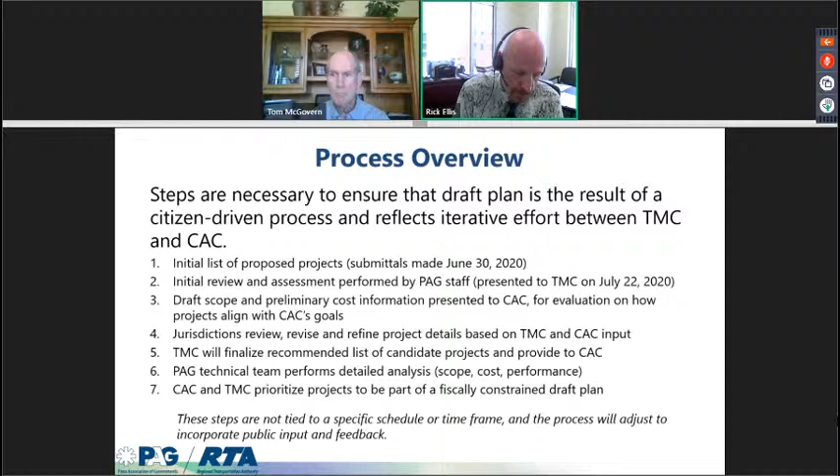The categorical items or the other elements that will be included, there's still a lot of work to be done on those. Those efforts will be coming at a later date and time, and those are still ongoing discussions that are occurring with you and the various presentations that you've heard over the last several months and will continue to hear as we move forward.

So a little bit more information on the review assessment that was performed by PAG staff. The summary table and the listing and the scope have been provided to you, and I'll go over that here in a little bit more. Then, as Paki leads us through the effort, you'll get to see a little bit more of the details surrounding each project. But the information that was presented to TMC focused primarily on the scope elements, making sure that all the elements are properly captured and incorporated.

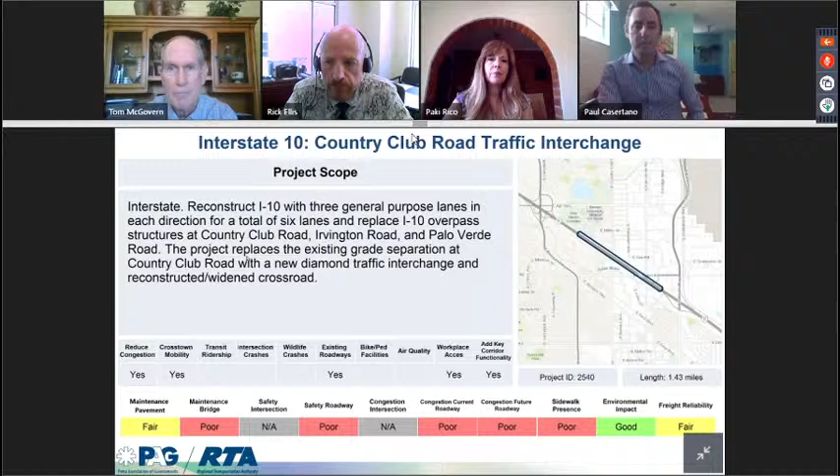Thanks for pointing that out, Tom. If I may add, you do have a handout with the cost breakdown, and on your handout it indicates how much non-RTA funds are provided for each project as well. So that's already broken down in your handout.

Okay, thank you. The next project is the Interstate 10 Kino Parkway Traffic Interchange Project, another reconstruction interstate project. This one's a little over a mile long. It's aligned with about half of the CAC goals, and it has 6 performance measures that need to be addressed.

This particular one is just to the west of the previous one, so this would be the next stage that would be addressed. As mentioned, this will widen the existing roadway, reconstruct it, and provide 3 lanes in each direction, including the reconstruction of the structures over Ajo, the diversion channel, and then Kino Parkway as well.

Again, we're dealing with existing condition data, so you see some poor performance in maintenance and bridges that needs some attention. The safety roadway data—recognize that that is picking up some of the local facility content associated with that project boundary. And then we do see some system performance congestion data showing up as part of our modeling efforts.

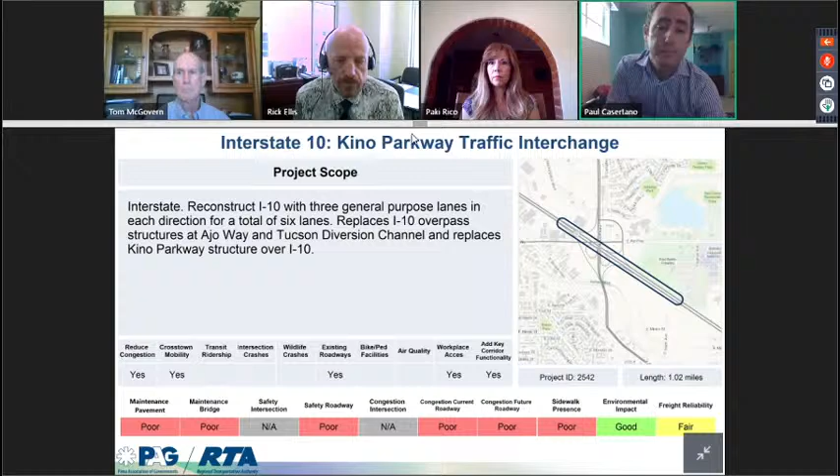The next project is Interstate 10 Park Avenue Traffic Interchange, another interstate project. This is a ramp reconstruction, about 1.65 miles long. It is aligned with 2 of the CAC goals, and it has 4 performance measures that need to be addressed.

As mentioned, this project continues and moves all the way back to the west end, and this primarily deals now with the operational improvements and enhancements that need to be made to the system to ensure that we get maximum capacity out of it. So it's dealing with ramp configurations, tie-in points, flyover configurations, ensuring that everything meets current standards so that we can maximize the operational capability. This particular stage does not add any mainline lanes to I-10.

Existing condition performance shows pavement needs some attention, certainly. There's some congestion showing up in modeling efforts. You will see good congestion at the intersection level—recognize that's picking up some of the signalized intersections associated with existing facilities, not necessarily the interstate-related system performance.

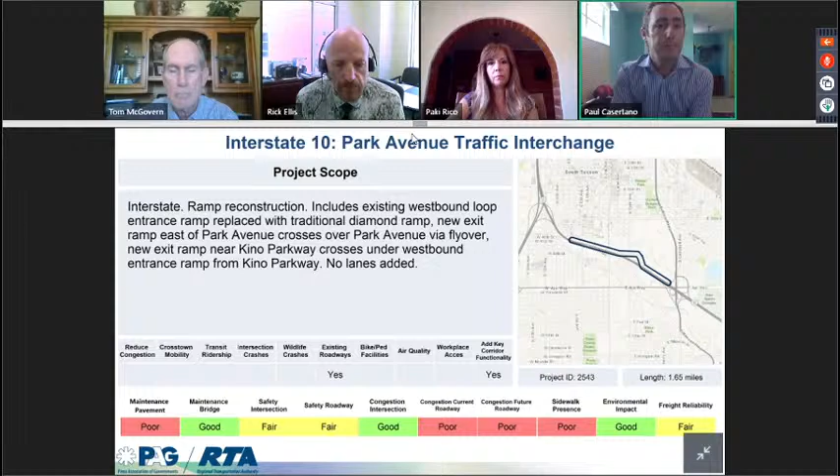Next, we have Interstate 10 6th Avenue Traffic Interchange. This is another interstate widening project. It's just under a tenth of a mile in length. It's aligned with 2 of the CAC goals, and it has 3 performance measures that need to be addressed.

This particular stage addresses the congestion related at the overall interchange and focuses on the cross street, 6th Avenue, adding the necessary turning lanes for throughput capacity on mainline 6th Avenue while ensuring the overall functionality of the interchange is compatible with the rest of the system, both 6th Avenue and mainline I-10. So while it doesn't add any lanes to Interstate 10 in this stage, it addresses the necessary congestion relief at that interchange.

Existing condition performance data shows pavement needs some attention again. The safety roadway data picks up some of the local facility content around the project area. And modeling shows there is some future roadway congestion in this area to be considered.

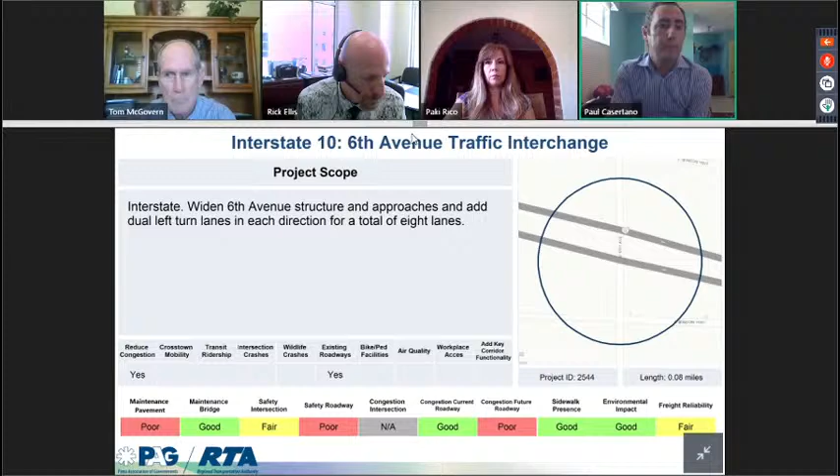Interstate 10, Alvernon Way to Valencia Road. This is another interstate reconstruction project. It's a little over 2 miles long. This one is aligned with 5 of the CAC goals, and it has 3 performance measures that need to be addressed.

This next stage of the project moves further back down to the east of the country club area, and focuses on the ultimate configuration connections associated with Alvernon Way and SR 210. I'll talk about those stages in upcoming slides. It then continues the mainline widening as well as structure replacement as it gets down to and ties into the Valencia Road interchange.

Existing condition performance data shows your pavement is getting to a place where it will need attention soon -- good to keep an eye on that. Congestion issues are showing up in the modeling process for both the current roadway network and the future roadway network.

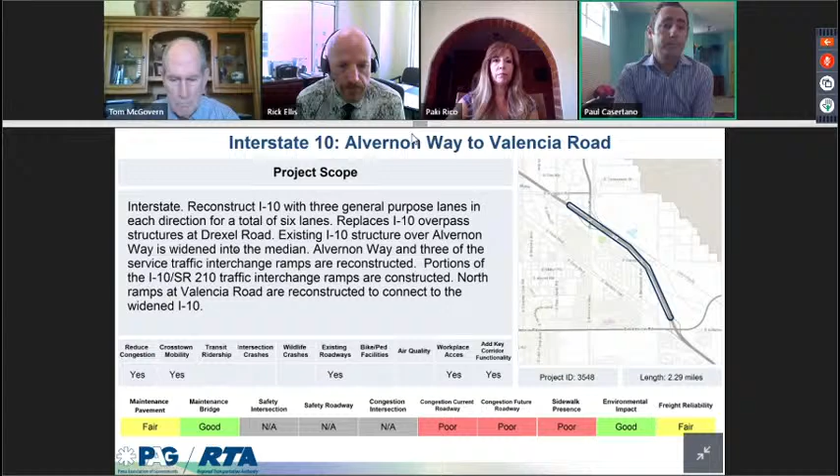The Interstate 10, Interstate 19 to Kino Parkway project is an interstate widening project. It's almost 1.5 miles in length. It aligns with 5 of the CAC goals, and it has 4 performance measures that need to be addressed.

If you feel like you're playing a game of whack-a-mole, that's kind of the way to think about this, because you're really trying to chase different areas, different improvements, but it all does come together and ensures that the previous components that are built are effectively integrated.

This project moves down to the west end after the mainline reconstruction has taken place. The interchanges have been improved, the ramps have been put in place, and the mainline widening has been in effect. Now this goes back towards the west end and carries forward the 4-lane widening section so that you'll have a total of 8 lanes as you work your way up to the Kino interchange.

Perhaps strategic whack-a-mole in the sequence of the projects. Recognize that the existing condition data shows only those existing conditions for the project extent. There are issues that exist along the corridor that need to be considered, but what's provided for you here today is what existing conditions lie within the project extent.

So we see poor pavement showing up, and then future roadway congestion. Your current roadway congestion is okay, but not fantastic, so some issues to deal with. And again, you're looking at full corridor improvement, so this gives you the project area, but realize there's more behind it.

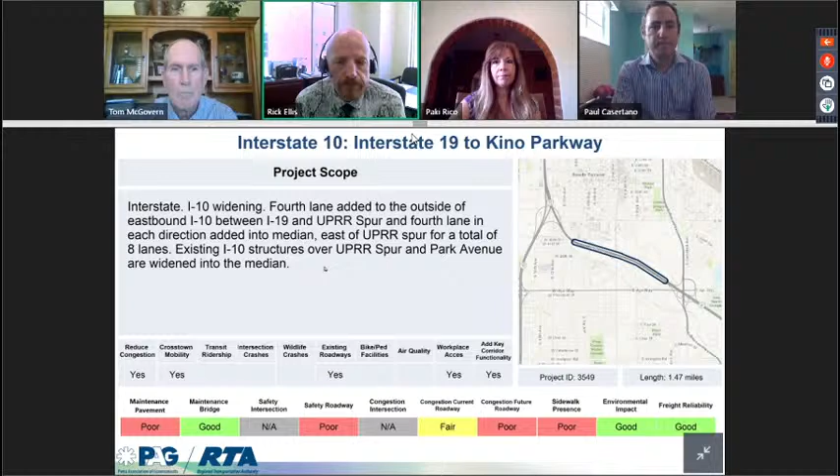Thank you, John. Next one is State Route 210, Stage 1. This is the principal arterial project. It's the first of 3 stages. It goes from Palo Verde to Ajo Way. It's 1.3 miles in length. It aligns with 4 of the CAC goals, and it has 4 performance measures that need to be addressed.

Reconstruction effort on I-10. I-10 operates as what we could designate as a full access control type of interstate or freeway system. This is obviously going to be a substantial project, and this is the first stage now that kicks in on the SR 210 expansion. As Paki described, it includes a lot of the ramp and connectivity work, with Golf Links, Alvernon, all the necessary connection points, and then the first portion to Ajo Way. So this is really laying the groundwork for what would be referred to as a system interchange at the very north end.

So the existing condition data may not tell you everything you want to know about the improvement project, but it gives you perspective of what's out there right now on the facilities that have been built. So you need to address poor pavement. There appear to be some safety issues and some intersection congestion issues that the project will likely address on the whole.

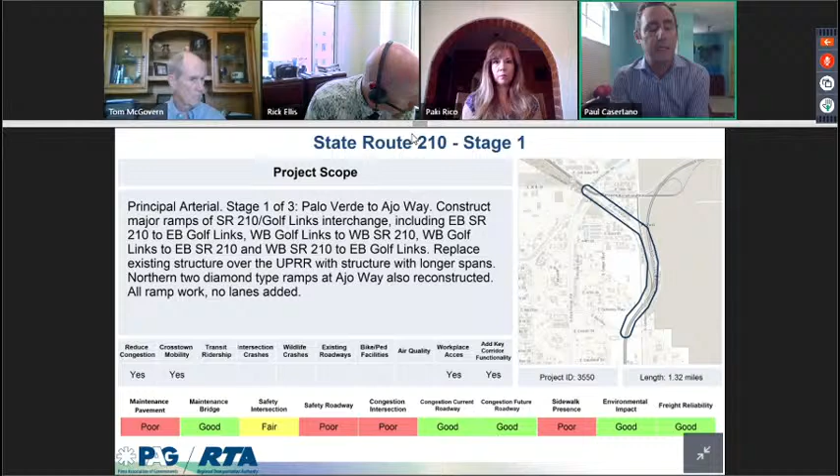State Route 210 Stage 2, this is the freeway project, and this is the second of the 3 stages. It goes also from Palo Verde to Ajo Way. It's 1.3 miles in length, is aligned with 4 of the CAC goals, and has 4 performance measures that need to be addressed.

Why this ties in: the previous stage project is going to focus on a lot of the ramp connections. This would complete those and then start in on the main line construction, the conversion from Alvernon Way as what you know as an at-grade or typical roadway that we'd see around the region to more of a freeway-type facility. Limited access provided only at interchanges that will be reconstructed. The number of lanes reflected also includes some connection lanes, which are all necessary as well. It meets all the future traffic demands and accommodates all the necessary capacity needs.

Quick question for both Paul and Rick. Could you imagine that this is perhaps a good way for the committee to look at projects over their lifetimes? In other words, State Route 210 is shown even on our information here as a principal arterial, and this is, I think, ultimately planned expansion to full freeway, from 25, 30 years ago, in a progression from a 2-lane roadway to a 4-lane divided and then on to freeway. Is that something you would anticipate seeing as a progression of improvements for certain projects like the Sonoran Corridor?

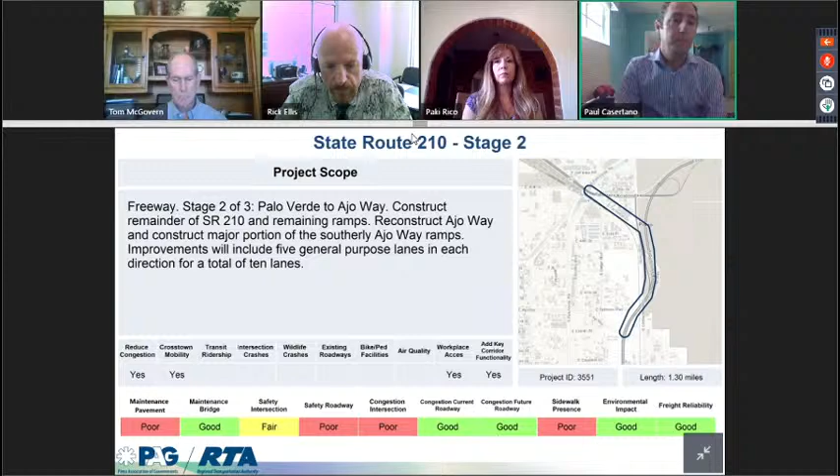Okay, moving on to State Route 210, Stage 3. This is again a principal arterial. This is the third and final stage of this particular State Route 210 project. It's from Ajo Way to I-10, a little over a mile in length, and it aligns with 4 of the CAC goals, with 5 performance measures that need to be addressed.

So this is the final stage of 210, and as I mentioned in one of the earlier sections, from Alvernon to Valencia on mainline I-10, this basically connects the pieces. All the ramp connections are made, the necessary improvements at Ajo Interchange are made, and essentially everything ties together with what are termed system interchanges, where you're going from one freeway system to the next.

Existing condition performance data shows poor pavement condition within the project extent. Intersection and roadway safety show poor performance, recognizing that's likely picking up some of the local facilities. It'll be a different concept to address safety within this type of facility, but recognizing there are safety issues is important. We also see some poor intersection congestion performance associated with the signalized intersections in the project.

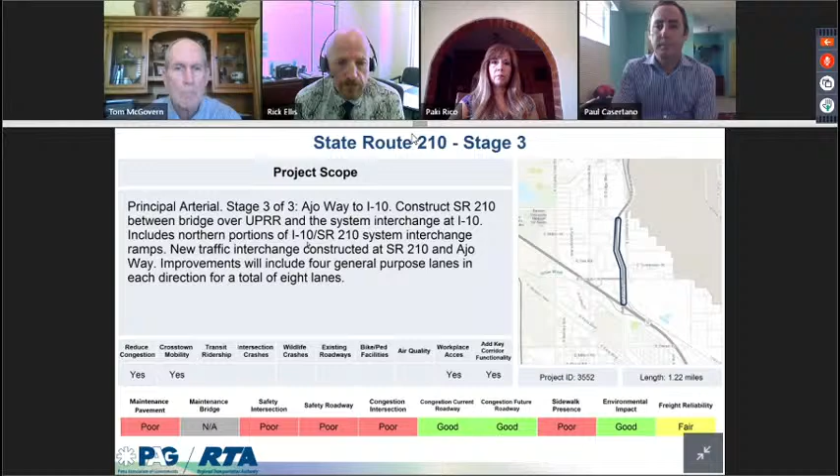The next one is Interstate 10 Valencia Road Traffic Interchange. This is another interstate reconstruction project, just under a mile in length. It aligns again with 4 of the CAC goals, and has 5 performance measures that need to be looked at. So the stages bring us back to Interstate 10, moving on to the next one. This continues the widening out to a 6-lane configuration, with all the necessary ramp connections, interchange modifications, and frontage road improvements to ensure the fully connected roadway system, continuing to march from west to east.

Existing condition performance data shows some poor bridge condition to deal with. Recognize that the system maintenance bridge performance measure doesn't necessarily show you where you may need expansion of a bridge; it just shows the condition of the bridge and its ranking. So there could be capacity issues associated with bridge replacement. Poor bridge condition is not exactly equal to needing replacement—you may just need to do some work on it. You could also see good bridge condition where you still need to replace the bridge and expand its capacity.

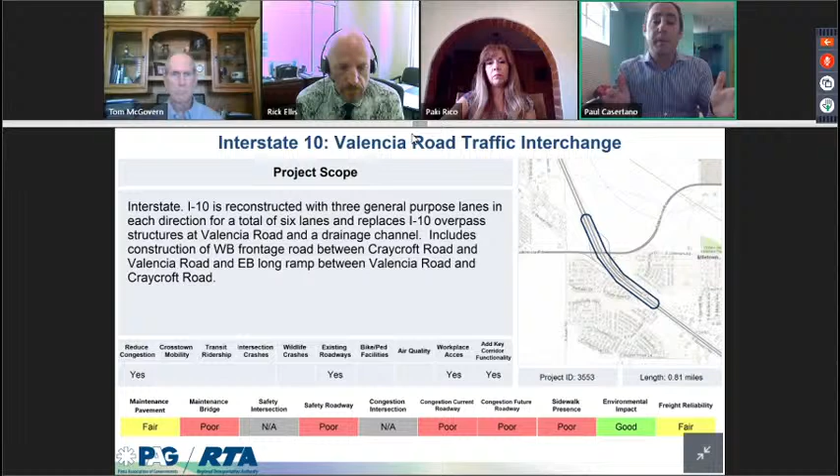Interstate 10, Craycroft Road traffic interchange, another interstate reconstruction project, a little over a mile in length, aligns with 4 of the CAC goals, and has 4 performance measures that need to be addressed.

Continuing with the next piece, these are all bite-sized project elements that can be tackled and bolted together to ensure the overall system comes together. This is the next one in line where it continues the 6-lane widening along with the interchange reconstruction now at Craycroft Road.

Again, existing condition bridge issues are showing up. You also see some system performance issues from efforts for both current roadway and future roadway. So it looks like there's some attention that needs to be focused in this area.

This is Arlen again, Paul, just a quick question on that one. Why would this freeway have good sidewalk presence versus the other ones?

Thank you, Mr. Chair. Arlen, I'm both happy and anxious that you asked that question. It's a good question, and we're going to have to look at it. I'm not quite sure, but the content is captured within the buffer that you see in that area. So I imagine there's some capture of some existing sidewalk presence, but we would need to pull up the platform and take a closer look as to why that might be the case. I'm kind of at a loss with that red flag. Thanks.

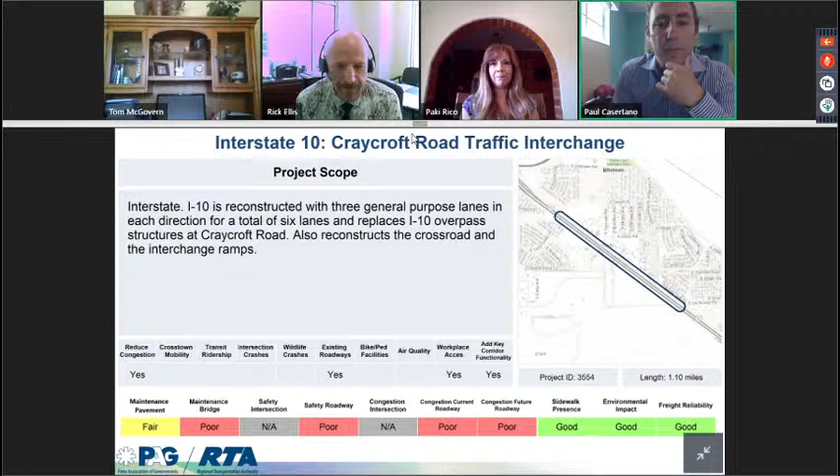Interstate 10, Wilmot Road traffic interchange. Another reconstruction on I-10, a little over 1 mile. It is aligned with 4 of the CAC goals, and it has 4 performance measures that need to be addressed.

I promise we'll stop when we smell the ocean, but as Paki said, continuing the next mile to the east and then tackling the Wilmot interchange, continuing with the main line widening and progressing on those set of improvements.

Ocean, what ocean? It's 103 degrees outside.

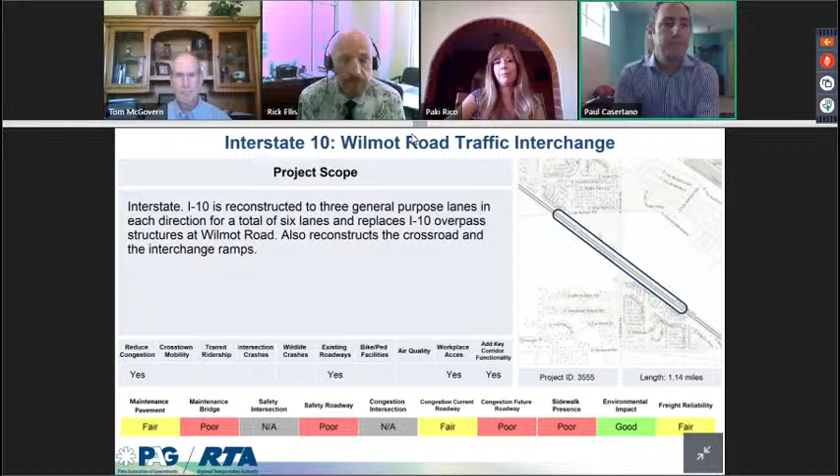Another Interstate 10, Kolb Road traffic interchange. Interstate 10 reconstruction, almost 2.5 miles in length, aligns with 4 of the CAC goals, and it has 4 performance measures that need to be addressed.

Now, this is the final mainline segment, but I'll come back on that because there's going to be enhancements with future projects here. But this is the one that then completes the segment from I-19 out to Kolb Road. The significance of this last piece, in addition to continuing the mainline widening and then matching back into existing, is that Kolb Road would be reconfigured into what's called a diverging diamond interchange.

It's the same configuration that is being implemented on the Houghton Road interchange that started construction recently. So it's just a different type of configuration, allows for a maximized traffic maneuver, helps address congestion issues, things like that.

Existing condition performance data shows pavement issues that are raising, and some of the congestion issues are showing up in the modeling efforts for both current conditions as well as future conditions. No bill.

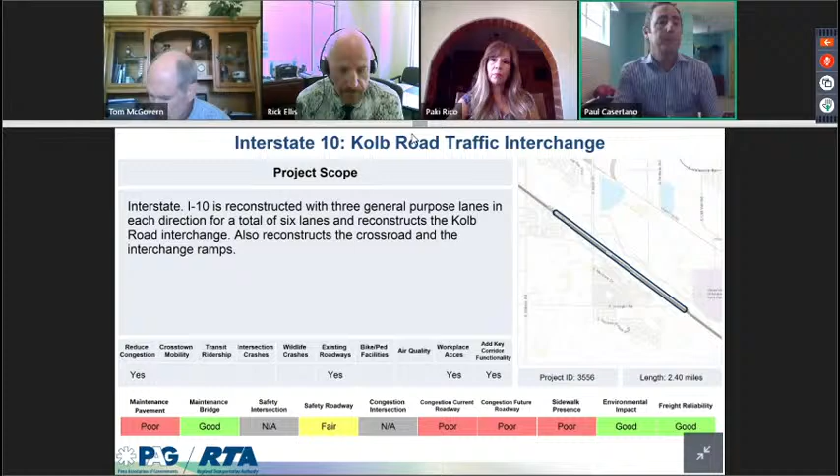Now we're moving into Interstate 10, Alvernon Way to Craycroft Road, Phase 1. This is an interstate, one of two phases. It's a widening, about 3 miles in length, and it aligns with only 2 of the CAC goals, and it has 5 performance measures that need to be looked at.

As I mentioned, these individual projects are part of the overall system improvements to Interstate 10 and to 210. And now these are the subsequent stages. So after the main line's been reconstructed to provide the extra lanes in each direction, bringing the total up to 6, or back further towards the west in terms of 8.

This now recognizes that as traffic grows and volumes change, it looks ahead to a future point in time where the main line will need to be widened and add an extra lane in each direction, bringing it up to a total of 8. So it addresses future demand, future capacity, future congestion.

To the question that had been raised earlier, do these all get built with the future in mind so that there's only one, basically hit it once and don't have to reconstruct everything? And the answer is that's correct, that's the exact way to look at it. All these would then bolt on as necessary improvements without undoing any of the previous improvements.

Existing condition performance data does show that you have some congestion issues to address. So that goes right in hand with what Rick is discussing. There's also some bridge conditions to be addressed, and fair pavement that continues to not get better every day.

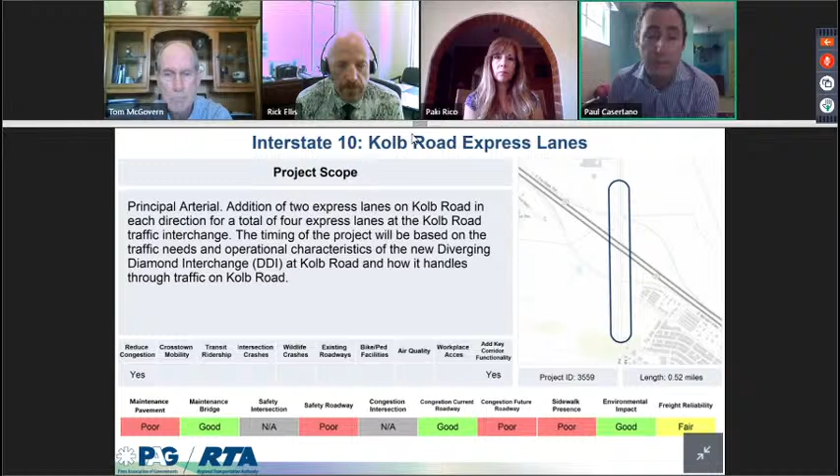Now we're back to the Interstate 10, Alvernon Way to Craycroft Road. This is Phase 2, the second of the final widening phases. It's a little bit over 3 miles in length. It aligns with 2 of the CAC goals, and it has 5 performance measures that need to be addressed.

So exactly as Paki mentioned, this now just comes back at a future time when the congestion levels warrant it, and adds the 2 additional lanes that are part of the ultimate configuration. If you've been counting at home, you may note that the section east of Alvernon is anywhere from 6 to 8 to 10 lanes, while the section west was more of a 6 and 8 lane combination. Obviously, the improvements at Alvernon, the future connection with SR 210, and converting that into a fully access-controlled freeway is going to change a lot of the traffic patterns, habits, and how that's done.

So the section of lanes reflects what's needed based on volume demands as we model that. Not too much to add here. You see the performance data of existing condition performance. Rick mentioned congestion issues and reconfiguration. You see that showing up in the existing condition, current roadway modeling, as well as future roadway network, no build condition.

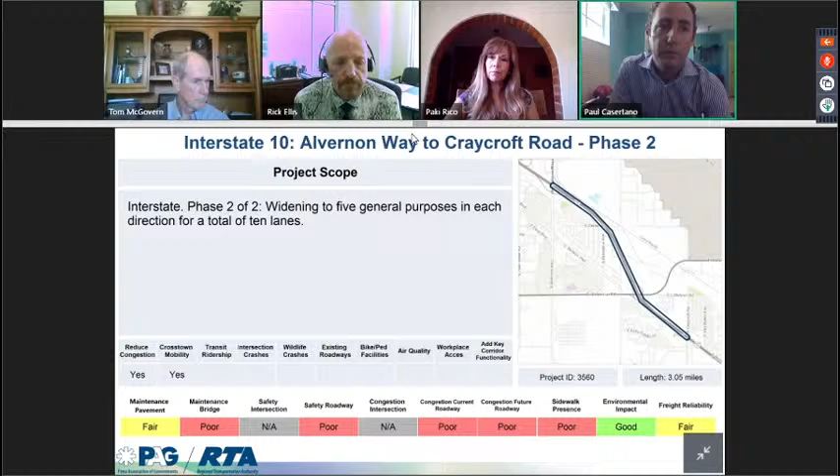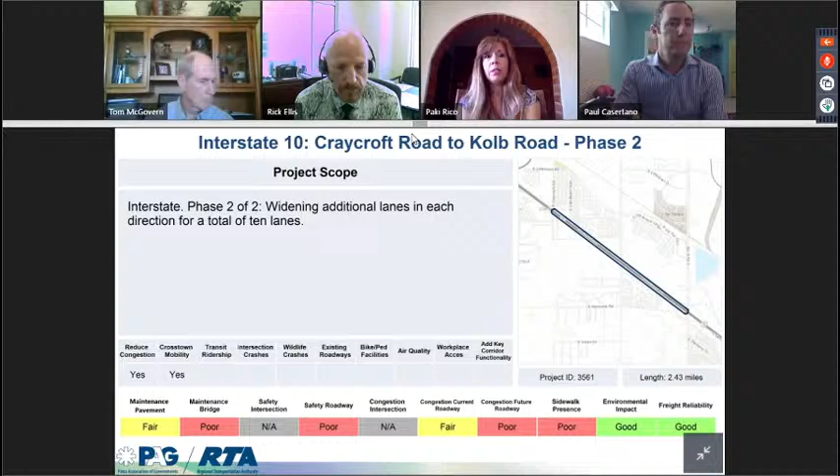And then again, the Interstate 10 Craycroft Road to Kolb Road, this is phase 2 of that project. This is the interstate widening, about 2.5 miles in length, aligns with 2 of the CAC goals, and has 4 performance measures that need to be addressed. And this completes the last piece, the last segment, the last phase, and the last project associated with the overall scope of improvements to I-10 and SR 210.

Just a reminder here that the existing condition sidewalk presence may not be relevant to all of the interstate projects per se. Certainly something to take into consideration. But again, looking across, you do see some poor performance and some slipping performance across the performance measure spectrum.

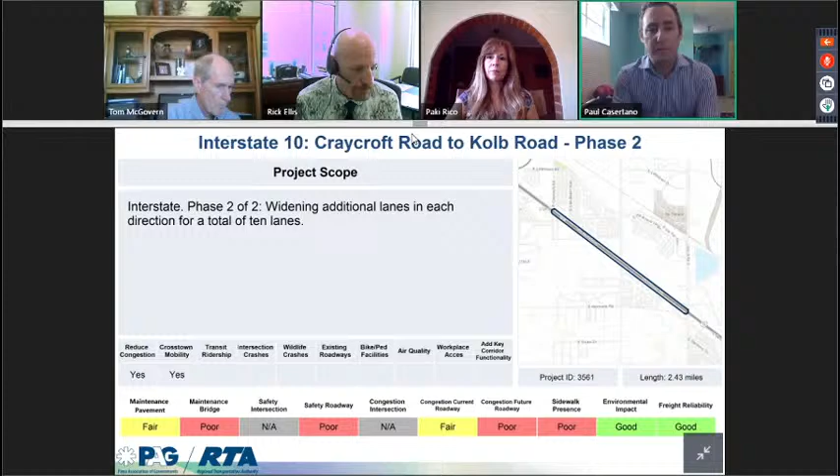Now we're at Interstate 10 Cortaro Road traffic interchange. This is an interstate project, and it's about 1 mile long. It aligns with 6 of the CAC goals, and it has 4 performance measures that need to be addressed.

So this one now shifts gears a little bit, and for those of you that have driven I-10, this is very familiar to interchange improvements that you're seeing currently underway, or you have seen in the form of Prince Road, Ruthrauff, Ina, where essentially the interchange and the cross street are flip-flopped to provide grade separation over the abutting railroad track located just to the east. So Cortaro Road interchange is the next one in line, where Cortaro crosses the railroad tracks at grade. This would essentially flip that, with Cortaro going up and over the top, similar to the configuration you see all up and down the stretch of I-10.

You do see when looking at the existing condition performance data that there are some data gaps here. There's no intersection data available for this project extent, which is in the circle that you see there. But still some good data to consider. One thing to note is the future roadway congestion is modeling poorly with the no build scenario, so something to take into consideration.

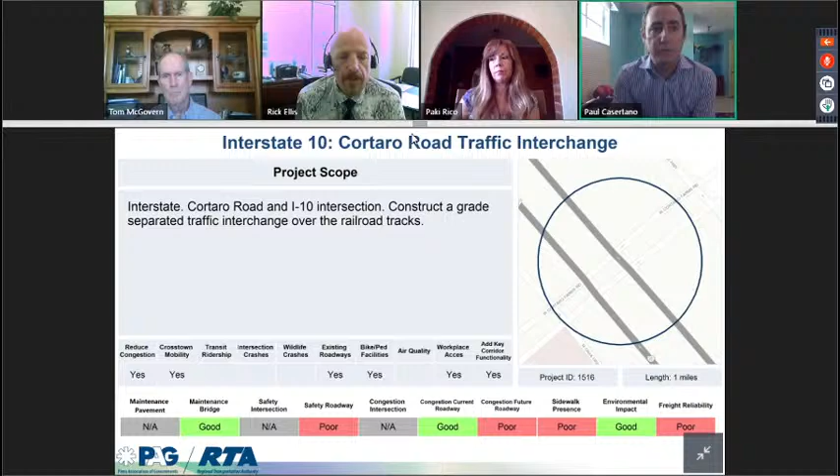The Interstate 10 Marana Road traffic interchange, another interstate classification, grade separation, about a mile long, aligns with 4 of the CAC goals, and has 2 performance measures that need to be addressed.

Similar to the previous one at Cortaro, and what you'll hear coming up on the next couple of projects, these projects are geared at improving the operational situation, conditions, and configuration by eliminating the at-grade railroad crossing that takes place there with the cross street.

Just curious, Rick - go ahead, Mr. Chair - this has fewer of our goals addressed than the previous one a couple miles away. Is it because of traffic volumes on the intersecting roads? I guess Cortaro obviously has a lot more traffic than Marana, but is that the reason that things like existing roadway box is not checked for this one as opposed to the other one? This is actually how it was submitted. So as we move through the refinement process, it'll be up to the CAC to determine whether something's lacking or something should not be checked.

Yeah, the initial submittal came in that way, but that allows for that discussion by the CAC. If you feel that no, wait a second, it really does address that, as Paki said, that could be added and those characteristics captured. Yeah, that'll be part of that homework I mentioned earlier, Tom. Does that help to clarify? Yeah, I think that's one that I would want to see some further examination of.

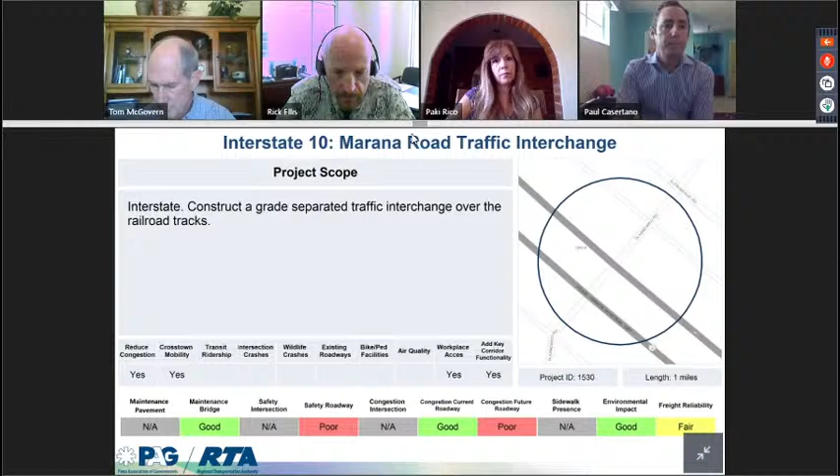The Interstate 10 Tangerine traffic interchange, another interstate grade separation, it's a mile long as well, and it aligns with half of the CAC goals, and it has 4 performance measures that need to be addressed. As Paki stated, it's a continuation of the grade separation efforts up there to get the cross streets up and over the railroad tracks to the east.

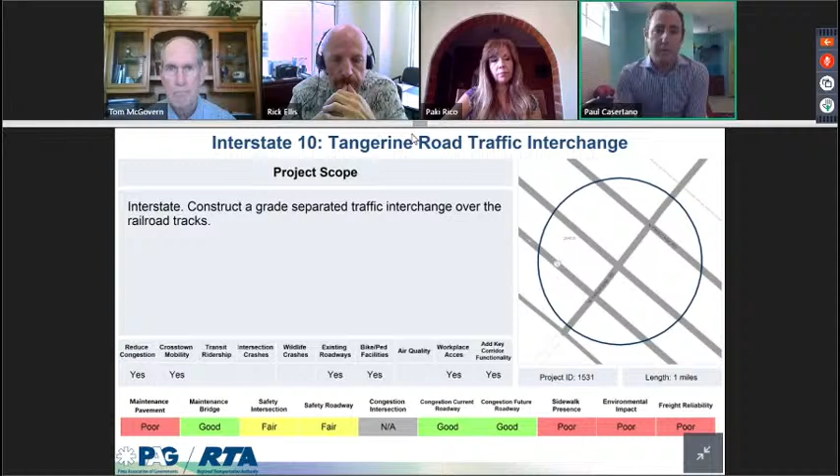Recognize here that you are picking up some existing condition intersection data as well as pavement data. And then there may be some sidewalk presence issues that exist. Environmental impact shows up. So that's something that typically will be addressed during the project development itself and all of the NEPA process that the project is required to go through.

The Interstate 10 Moore Road traffic interchange, similar interstate grade separation, a mile long. It aligns with 4 of the CAC goals, and the performance measures, they're not applicable. Nothing to add from this one. It's a continuation of what Paki's been referencing.

We do see some data gaps in performance measures, but don't let that turn you off. It simply means that we need to hunt a little harder to understand the performance of the existing facilities around that area.

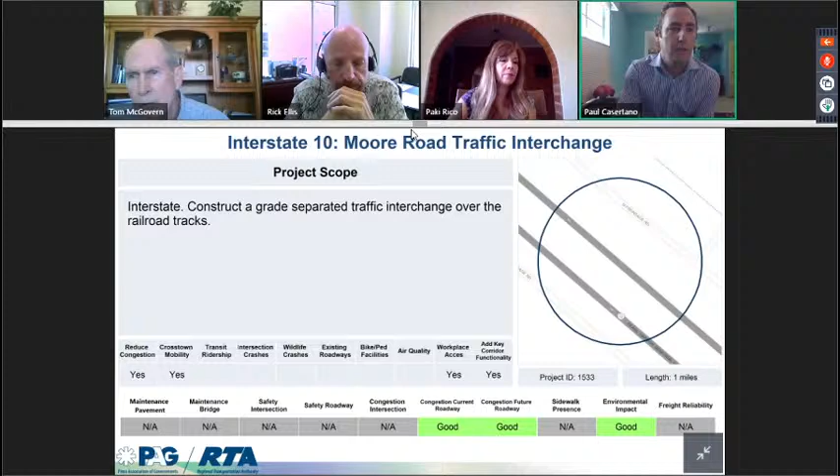Houghton, or Houghton Road, however you want to say it. This is the principal arterial project. It goes from Andrada Polytech High School to Camino del Toro. This is almost 5 miles in length. It is aligned with the majority of the CAC goals, and it has 4 performance measures that need to be addressed. So after the first day of building all the interstate improvements, now we shift onto the arterial system with the second day.

Essentially, this one, as you are aware, the current RTA plan includes a number of improvements that have either been completed or are underway for everything north of Interstate 10 up to the vicinity of Tanque Verde. And then the interchange improvements, as I mentioned, are under construction. This now starts carrying those improvements down to the south as well to provide that necessary north-south primary corridor connecting all parts of the eastern part of the region.

Recognize here that you do see some existing condition performance issues. Where you don't necessarily see it is in the congestion, but recognize that the congestion is looking at existing conditions as well as a no-build scenario. So not necessarily forecasting in what is anticipated to be development patterns in this area within the future congestion ranking that you see here.

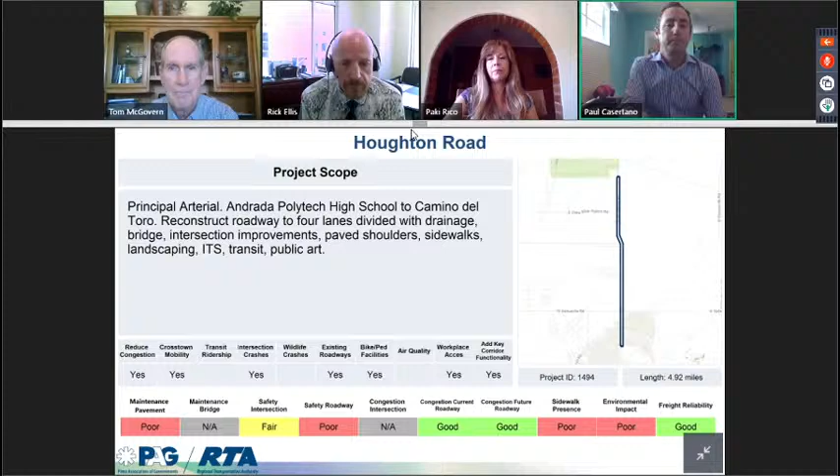We have Ina Road. This is the principal arterial project that goes from the Cañada del Oro Wash to Paseo del Norte. It's 4 miles in length. It aligns with the majority of the CAC goals, and it has 4 performance measures that need to be addressed. So pretty straightforward, as Paki described. It's one of 2 Ina Road improvements that are proposed, and would essentially take the existing 4-lane roadway and turn it into a 6-lane boulevard with all the necessary appurtenances for intersections, shoulders, pedestrian, and multimodal facilities.

Plenty of existing condition performance issues to choose from here. So looking across the spectrum, you see your pavement is beginning to fall a little bit. There's some intersection safety issues to be addressed, as well as intersection congestion issues. The segment itself is having performance issues, both in existing condition roadway as well as future condition roadway. And then certainly sidewalk presence is something that's been looked at for quite some time up there. So opportunity for improvement there.

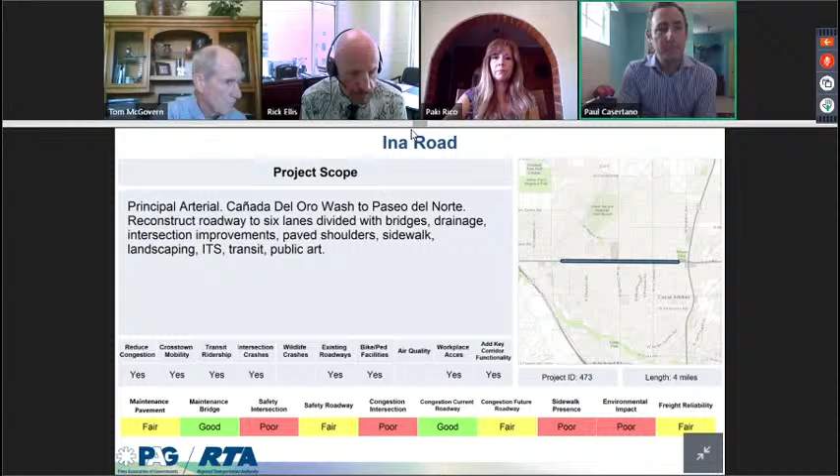The next Ina Road project is also a principal arterial, and it's from I-10 to Camino de la Tierra and the CDO Wash. It's just under 2 miles in length, and it aligns with most of the CAC goals, and it has 4 performance measures to be addressed. Very similar to the previous project, and obviously this ties into the interchange work that was just recently completed with the reconstruction of the Ina Road interchange. So essentially it's looking at that whole segment all the way up to the vicinity of Northern for improvements, addition of bike ped facilities, and widening enhancements.

Existing condition performance shows some pavement issues beginning here, as well as some safety issues. Certainly congestion we know is continuing to be an issue in this area, and sidewalk presence is ripe for opportunity again.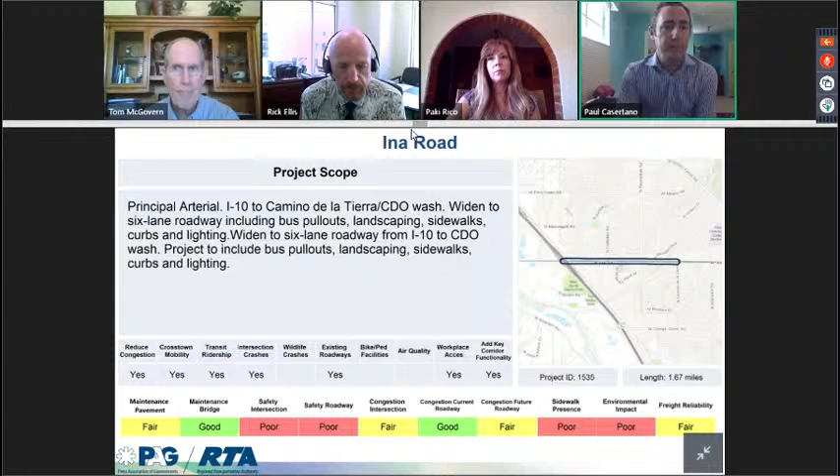Next, we have Sabino Canyon Road. This is another principal arterial. It goes from Tanque Verde Road to River Road. It's a reconstruction, 1.4 miles in length, aligns with most of the CAC goals, and has six performance measures that need to be addressed.

One recurring theme you'll notice through these projects is the tie-in to previously completed or previously identified RTA projects, to ensure system connectivity. This project would take off from the Tanque Verde intersection, built as part of the Sabino connection completed not too long ago as part of RTA's current plan, and would continue the widening up to the vicinity of River Road to provide necessary capacity and congestion relief through that area. It's tied to the system and projects previously completed, which is critical to note.

Good point there. Certainly there are existing condition performance issues. You'd anticipate continuing performance issues when tying this facility to adjacent facilities, but there's a lot to consider here in making a well-rounded project.

Is a portion of this segment within the city of Tucson, and would Pima County take responsibility for implementation? Lead jurisdiction would be developed or identified when this project moves forward and its implementation period is identified. I believe the main intersection is within the city limits, but the most appropriate lead agency would be determined as we get closer to implementation.

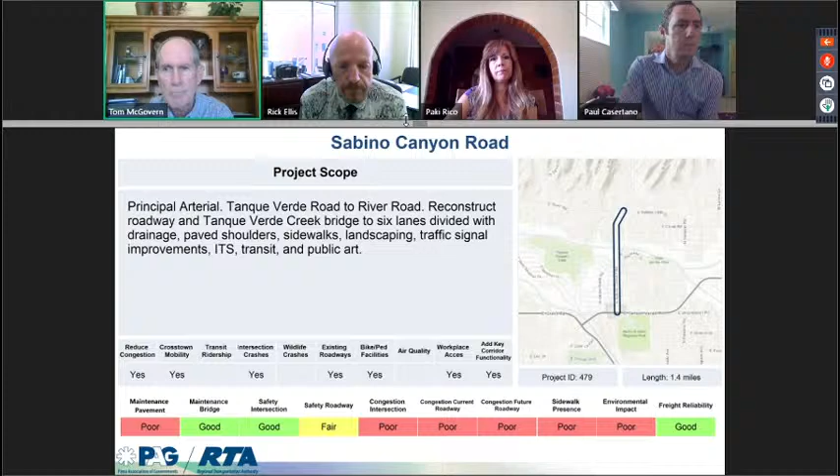Next, we have the Tangerine Road Connector. This is a minor arterial project, and it goes from Tangerine Road to Sandario Road and Magee Road. It's over 5 miles in length, and it aligns with most of the CAC goals. No performance measures at this point.

Continuing with the theme — new roadway? That's right, this is an all-new roadway on a new alignment. I'm assuming there would be some environmental impact.

I'll let Paul talk to the environmental impact aspect and how that interfaces with existing conditions. Continuing the theme of ensuring the investments already made — particularly the improvements on the northwest side of town, like Tangerine Road — get the lifespan we anticipated. This will provide alternate connectivity and alternate facilities so the overall system functionality is fully integrated, and we don't rely on just one roadway to carry the bulk of traffic. So the investments made so far will continue to last a very long time.

Paul, if you want to talk about the environmental aspect, to the chair's question. Sure, Mr. Chair, there are environmentally sensitive areas in the area of the project extent, but due to the lack of existing condition data, that's not necessarily shown in your sheet today.

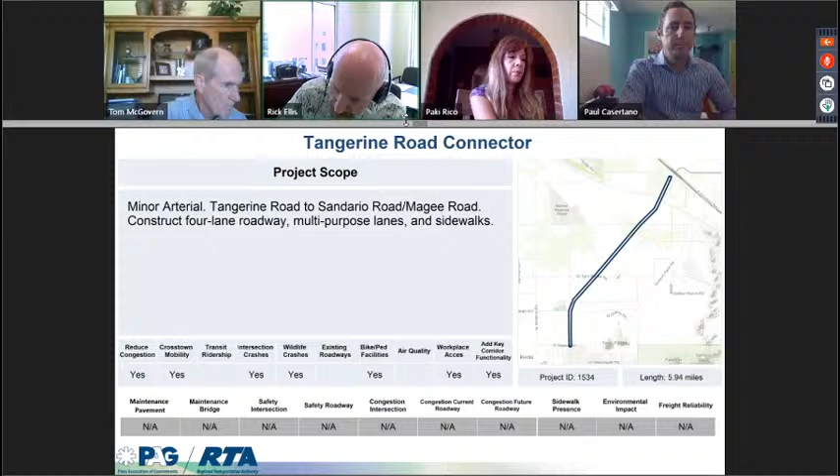The next one is Tangerine Farms Road Extension. This is a major collector classification, going from the I-10 traffic interchange to Clark Farms Road. It's about 1.5 miles long, aligned with 6 of the CAC goals, and no performance measures at this point. Similar to the previous project, with similar benefits, goal, and purpose of providing connectivity and alternate facilities to ensure the longevity of the overall system.

So this is a brand new connection going up to the I-10 area on a brand new alignment. Brand new facility, no existing condition performance data. At first glance, it doesn't appear to overlap with environmentally sensitive areas, but that'll be looked at as the project moves forward.

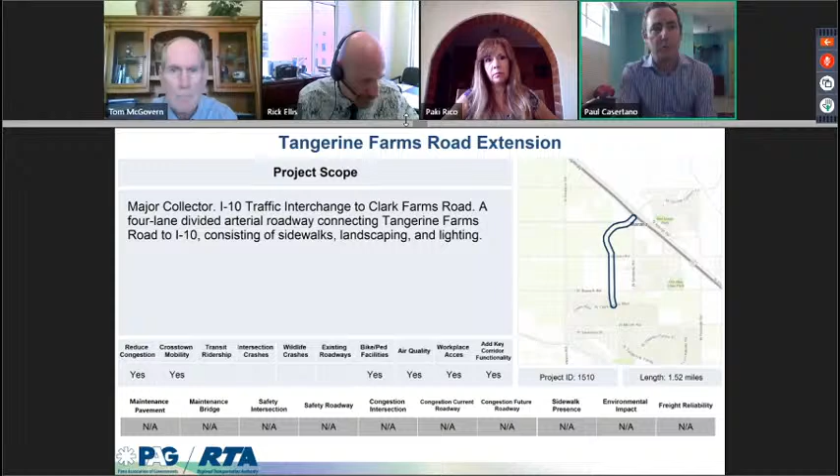The next one is Hardy Road. This was submitted as a minor arterial classification, from La Cañada Drive to Oracle Road. It's 1.5 miles in length, aligned with 5 of the CAC goals, and has 4 performance measures that need to be addressed.

This existing stretch of roadway is predominantly a simple 2-lane roadway, with a combination of minimal paved shoulders or in some cases just graded shoulders. No drainage improvements to speak of, but it does have a number of cross-street and driveway connections. So the improvements would help improve overall operations, and the scope of the 3-lane section would meet future demand.

Existing condition data shows poor pavement conditions and some safety issues that need to be looked at, as well as sidewalk presence.

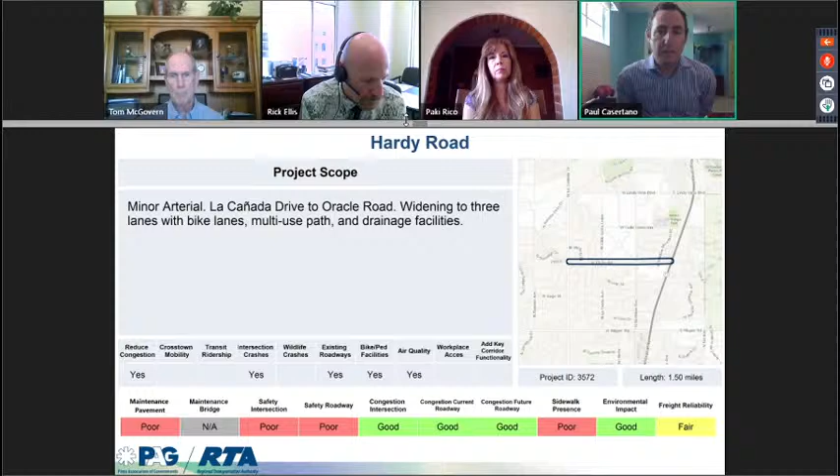Thornydale Road, minor arterial project. It goes from Cortaro Road to Camino del Norte. It's 3.5 miles in length, aligned with most of the CAC goals, and has 6 performance measures that need to be addressed.

As many of you may be familiar with, a number of improvements made in the northwest side of town over the last decade or so include improvements to Thornydale, Magee, and Cortaro, as well as Tangerine Road. This continues that theme of connectivity, making sure the new improvements are connected with the second round of improvements or complementary pieces to ensure the overall effectiveness is maximized.

6 performance measures to be addressed. Existing condition, we'll leave it at that. Plenty to choose from.

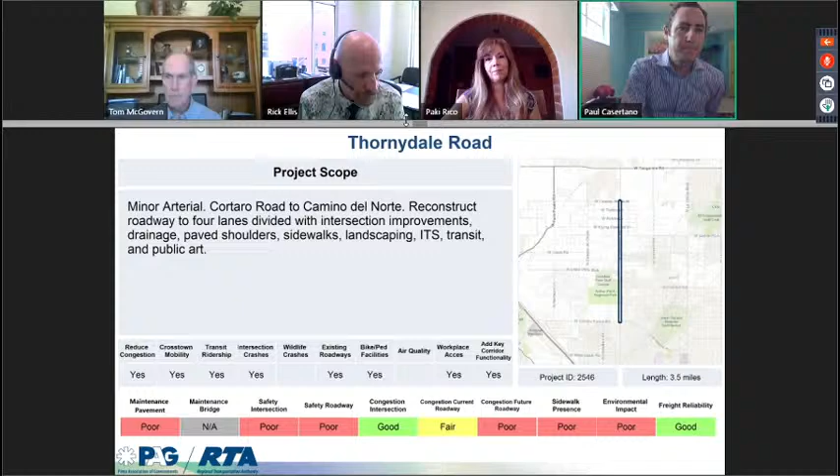Valencia Road, another minor arterial classification from Camino de la Tierra to Mission Road. This is about 1.25 miles long, aligns with most of the CAC goals, and has 7 performance measures that need to be addressed.

The improvement projects associated with the '97 bond improved the segment from Mission Road to I-10 and widened it to 6 lanes. This essentially goes further west, addressing capacity, operational, and multimodal needs from Camino de la Tierra to Mission Road, ensuring that section is brought up to full standards and meets current demands and operational needs.

Plenty of existing condition issues going on in this project extent, and it looks like there's a need for attention there.

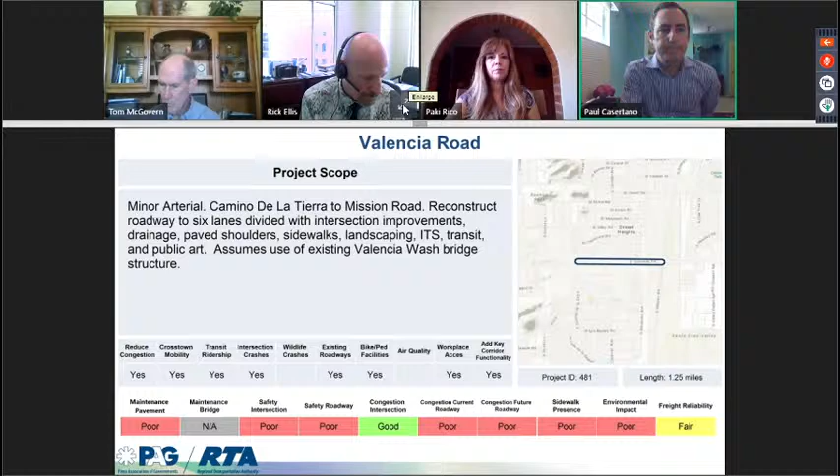Orange Grove Road, segment 1. This is a minor arterial project, one of 2 segments. This one's from La Cholla Boulevard to Oracle Road. It's about 1.5 miles long, aligns with most of the CAC goals, and has 3 performance measures that need to be addressed.

As you've heard me mention a number of times, this ties in with other system improvements made at La Cholla, as well as those made at La Cañada, and we'll continue that forward on the section of Orange Grove that remains to be addressed. That small gap you see in the middle reflects that the improvements at the intersection where it crosses La Cañada were made under the La Cañada widening project several years ago.

Leading to that, you see no score or indication for intersection safety because the project extent does not grab that particular intersection. So recognizing again that the indication of performance is not the end-all be-all of the project needs. It gives you a guide and a place to start on where to look a little bit deeper.

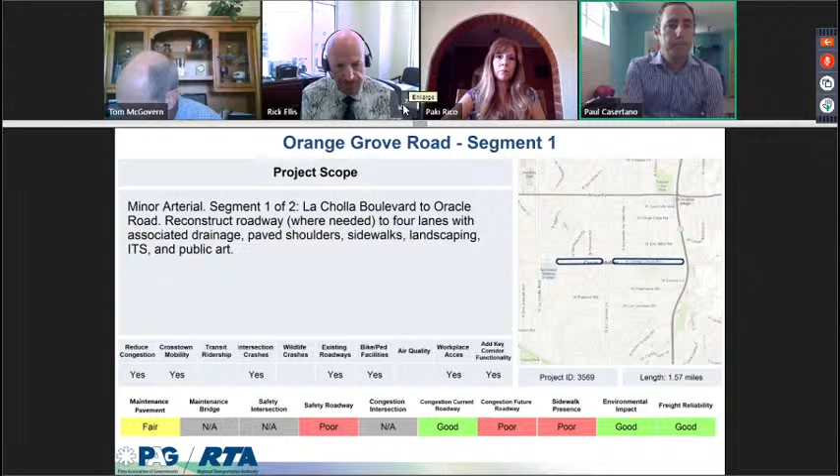And then there's Orange Grove Road, segment 2. Same minor arterial project, it goes from Oracle Road to Skyline Drive. It's about 2 miles in length, aligned with most of the CAC goals, and has a lot of performance measures that need to be addressed.

As Paki described, this perfectly lines up with the previous segment and continues the improvements all the way over to the Skyline connection. It was approved as part of the old '97 bond package approximately 15 years ago. So it ensures that side of town has adequate east-west capacity across multiple corridors, as well as intersection improvements to ensure maximal operations.

Highly utilized corridor already, and existing condition performance data kind of plays that out.

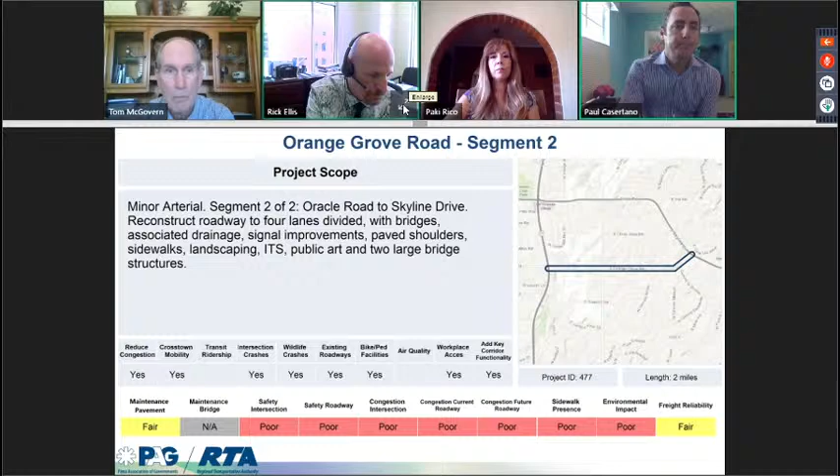Sandario Road is next. It's another minor arterial classification. It goes from Avra Valley Road to Emigh Road, I believe it's pronounced. So widening, it's about 2.5 miles long, aligns with most of the CAC goals, and has 3 performance measures that need to be addressed.

The existing roadway on this stretch is predominantly a 2-lane roadway with a stop control at Twin Peaks. This would bring it into full upgrades associated with the 4-lane, all the necessary appurtenances to address multimodal needs, plus intersection improvements and any turning lanes necessary for enhanced operations.

So while you may not see congestion issues arising in the existing condition performance data, you do see pavement issues as well as roadway safety issues. So still some things to consider in this project.

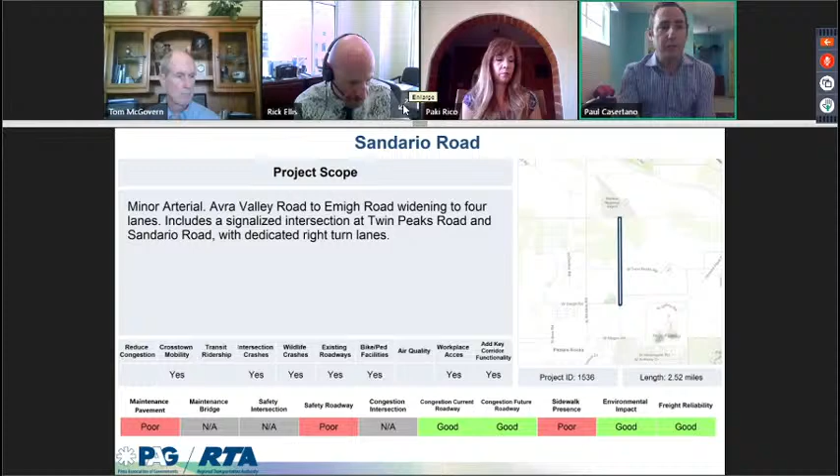Rancho Vistoso Boulevard is next, another minor arterial from Moore Road to Tangerine Road, 1.5 miles in length. It aligns with 5 of our CAC goals and has 3 performance measures to be addressed.

The existing roadway is well over 20 years old, built as part of the original development. The project proposes to reconstruct it to ensure it can meet traffic demands and volumes out there, while still providing the necessary lane configuration and multimodal facilities in the form of sidewalks, as well as pedestrian and multi-use facilities.

Existing condition performance data shows some safety issues there, as well as some sidewalk presence issues. Recognizing that while maintenance of pavement is not poor at this point, staying ahead of that is always advisable.

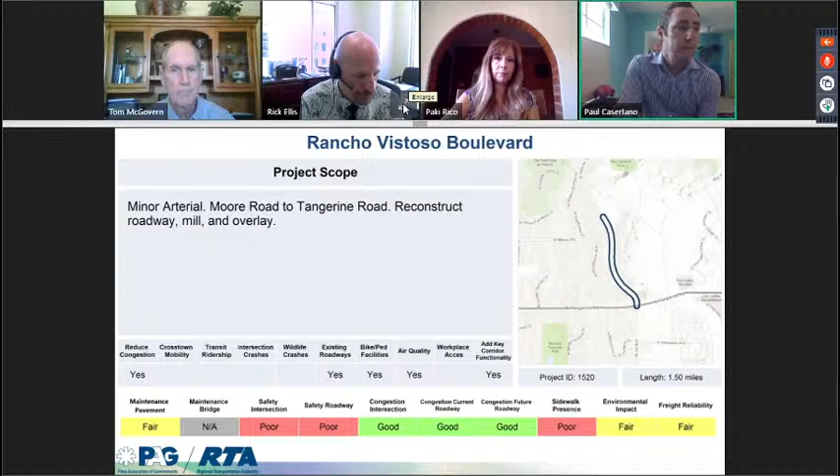Irvington Road, a minor arterial from Ajo Highway to Mission Road. This is over about 5.5 miles in length, aligns with most of the CAC goals, and has 5 performance measures to be addressed.

Similar to some of the other big corridors you've been seeing, the improvements out on Valencia Road have provided a nice companion piece. The improvements to SR 86 that have recently been completed ensure that facility is operating, and now this one has been identified to connect directly to SR 86 through an appropriate intersection configuration, as well as provide a variety of improvements to predominantly a 2-lane roadway.

There are sections of 3-lane, but they have minimal pedestrian facilities and bike facilities. Plus there would need to be some intersection reconfigurations out there to address the overall traffic mobility, throughput capability, and overall operations.

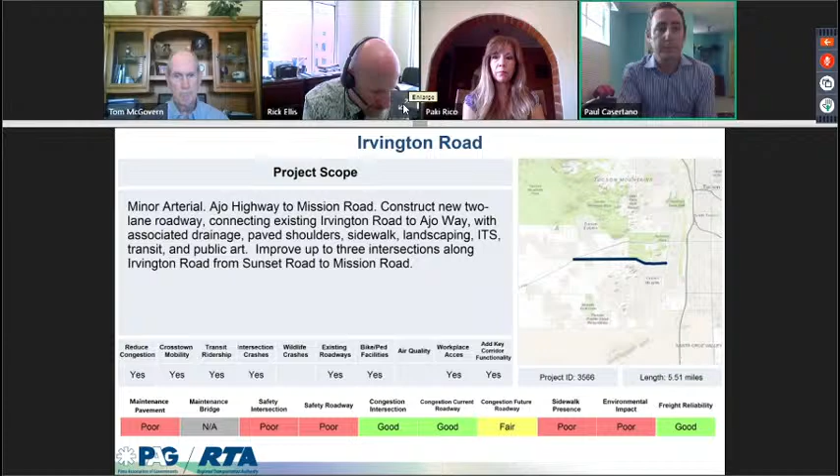Pima Mine Road, minor arterial from I-19 to Nogales Highway, almost 2.5 miles in length, aligns with almost all of the CAC goals but 1, and has 5 performance measures to be addressed.

As Paki mentioned, this is a roadway that connects I-19, then goes over to the Nogales Highway. Straightforward 4-lane widening to ensure the proper number of lanes for capacity and congestion reduction, as well as all the other necessary appurtenances for multimodal functionality.

Existing condition data shows pavement issues arising. There are some bridge issues there, and safety certainly needs some closer attention as the project is considered.

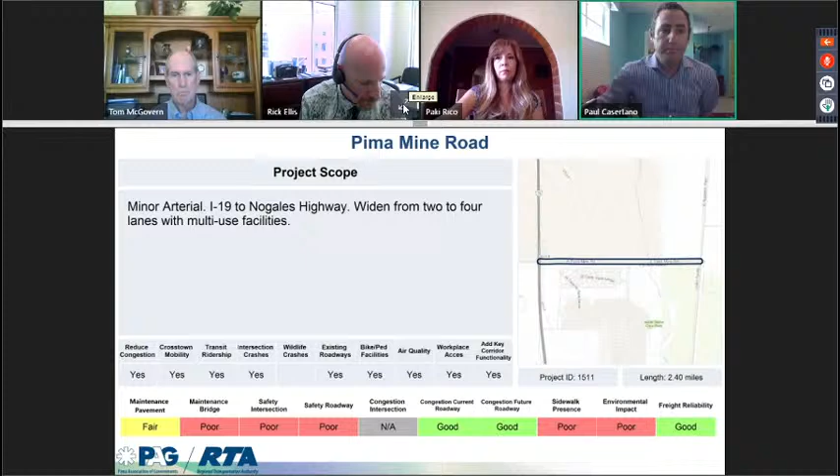Alvernon Way, minor arterial from Aerospace Parkway to Valencia Road. This is a reconstruction about 1.5 miles in length. It is aligned with 5 of the CAC goals and has 1 performance measure that needs to be addressed.

This is a continuation of several improvements and ties in with some of the improvements done to Valencia, as well as project efforts to the south done under separate efforts. There's a little gap you see in there, which we had noticed as staff ourselves. That would be part of the ongoing discussion with the TMC and CAC to refine and identify how that needs to be connected so the overall facility has full functional connectivity.

You see some existing condition performance data showing up. Bringing the project extent to include the gap would certainly show differently there, but there's lots to consider.

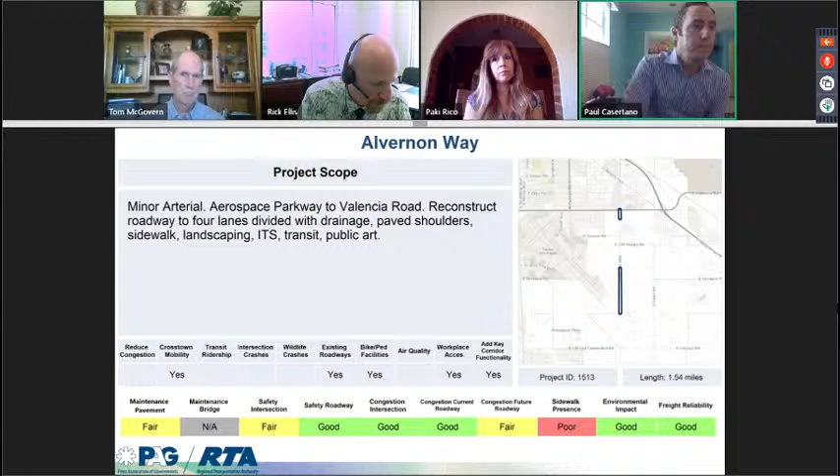And I think we have one more, right, Tom? Let's see, Nogales Highway from Calle Valle Verde to Sahuarita Road. This is 3.3 miles in length, aligns with all but one CAC goal, and has 3 performance measures to be addressed.

This project would essentially start with the intersection improvements that were done in the White House Canyon Continental area, and would continue the improvements all the way to match into Sahuarita Road, where the 4-lane section has been built out as part of previous and past projects.

So here's just one more. Go ahead, here's Paul.

An example: existing condition performance data may not tell the whole story of the project. There are needs out there certainly. You may not see it perfectly clearly when you look across the performance spectrum, but there are certainly needs in certain areas, and emerging ones as well.

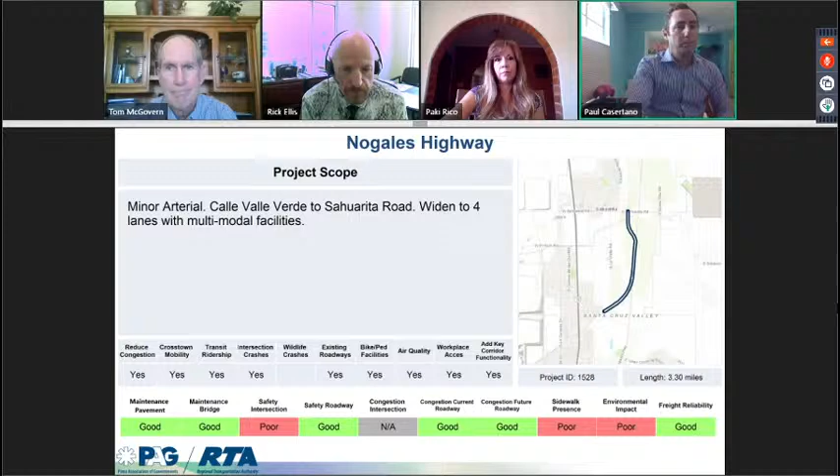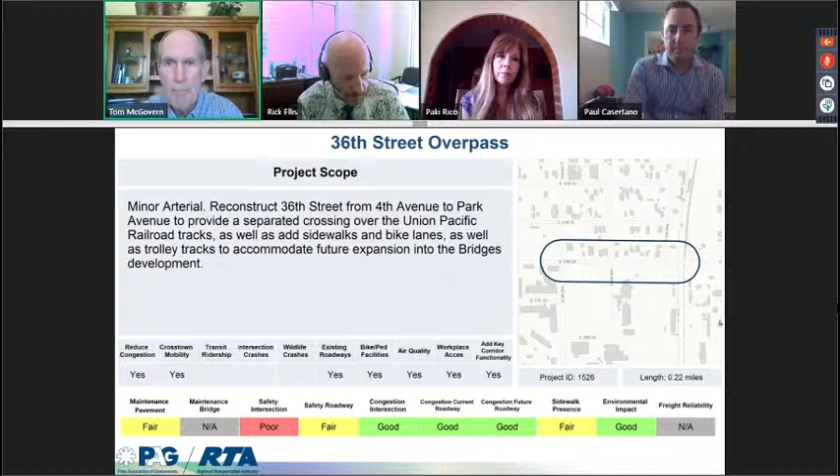Very good, thank you all for the presentations. Paki, you talked about homework - I'm wondering if these data sheets we've been seeing here can be made available to the committee before we meet again, so that homework could be advanced reading, if you will. Okay, I will follow up on that, Mr. Chair. Very good. Any comments from - oh go ahead Paul, sorry.

Sorry Tom, just a few clarifications along the way related to some of the questions we've received. I misspoke in saying the Houghton project doesn't take into consideration future growth - it does. It doesn't take into consideration the newly built facility, and the future growth may not look exactly the way others may anticipate; it's the way that we model it. So certainly some stuff to be considered there.

And then in addition to that, the Craycroft TI project does have good sidewalk presence because there are sidewalks in the underpass that are showing as complete, so that brings that project up to a good sidewalk presence rating.

And then lastly, what we're looking at is Tangerine west of I-10 does not currently show up in the general plan unless it is an expansion of an existing piece, but we would have to defer to Marana for that one. So bear in mind it might be in there, but we're not seeing it as explicitly as we look at the general plan.